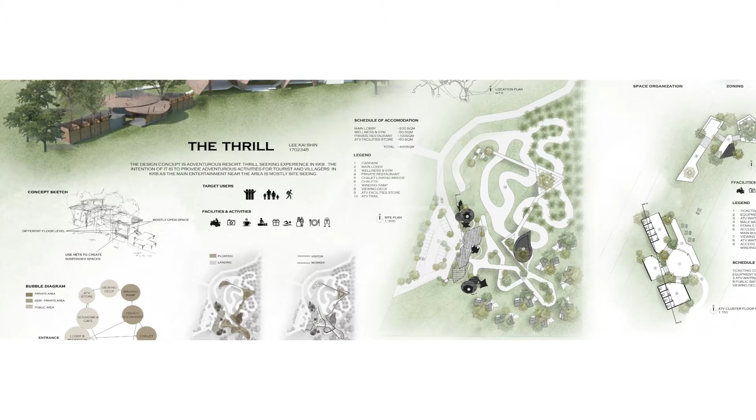This is a thrilling concept resort derived from the hierarchy of vegetation on site. This adventurous resort is to provide a thrill-seeking experience for tourists and villagers in KKB, as their entertainment in the area is mostly sightseeing. The activities provided are to attract thrill seekers, families, and tourists.

The site is split into two zones, landing and floating. All the buildings that sit on ground are categorized as landing, whereas the suspended buildings are floating. The purpose of this zoning is to strengthen the concept of thrilling experience by celebrating height in the proposed design.

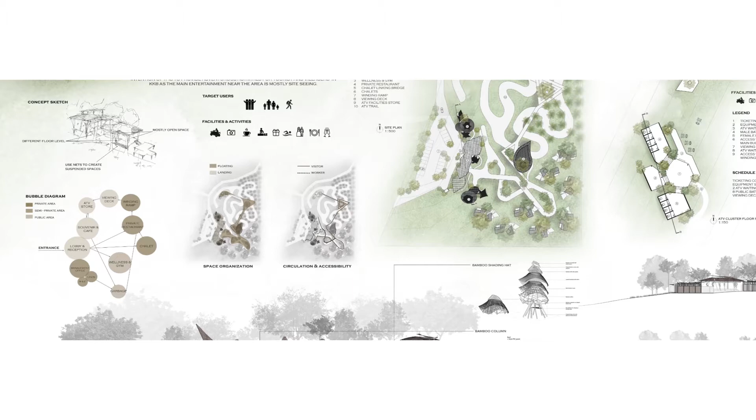This is the idea sketch of my concept, which uses mainly three methods to interpret the concept of thrilling. First, creating mostly open space by minimizing the use of walls. Second, each building is positioned at a different floor level. Third, the use of net as a shading device and building element to create suspended space.

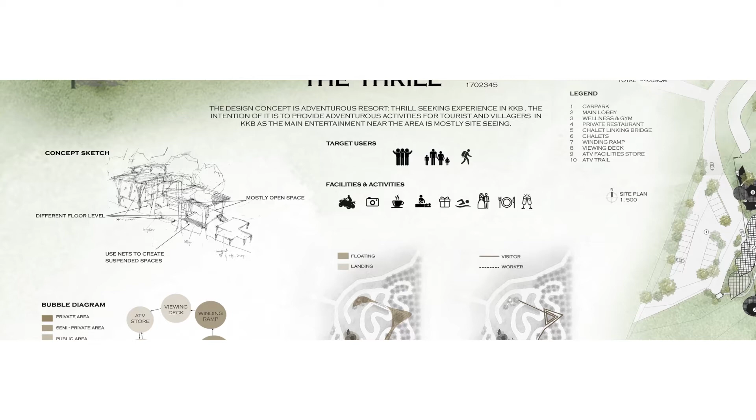This is the bubble diagram of the overall site, and this is the overall site section cutting through the ATV store, main building, and the wellness center.

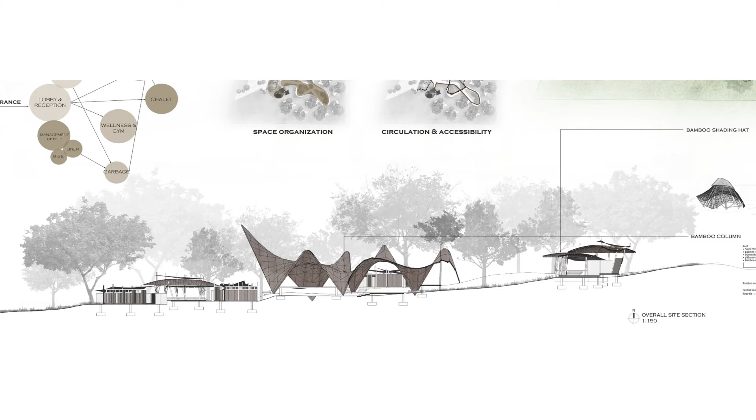This is the site plan. The buildings are linked by a bridge that brings the user from the ground to higher ground.

Now I'm going to talk about the floor plans for my three clusters. The first one is the main building cluster, which includes a lobby and a wellness center.

All of the spaces are basically categorized into two zones, workplace and shared place, where the workplace is only accessible by the worker.

This is the dropping area right in front of the reception. From the right side of the building, the management office and the garbage room are located at a distance from the lobby. This is to provide privacy for the workers.

At the left side of the building is a cafeteria with a souvenir shop. The guests can also access the ATV store through the souvenir shop.

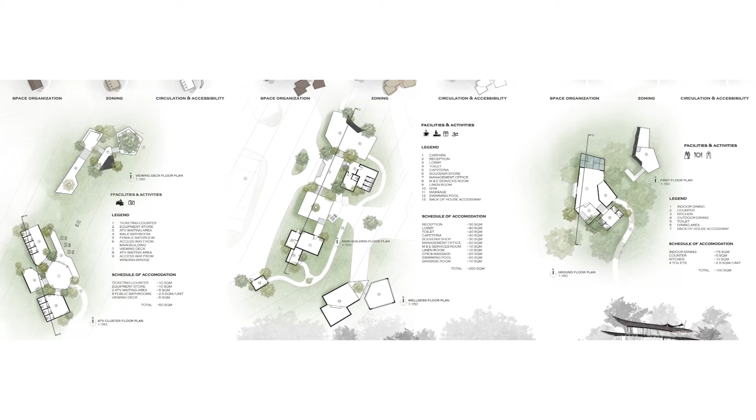This is the section cut of the main building and the elevation for the cluster.

Next is a cluster mainly for ATV facilities. In the floor plan, the ATV equipment store is located right behind the ticketing counter for the convenience of the worker. There are also public bathrooms provided for visitors that came for the quad bike challenge.

In front of the ticketing counter, there is a waiting area for users to access the viewing deck. And this is the plan for the viewing deck.

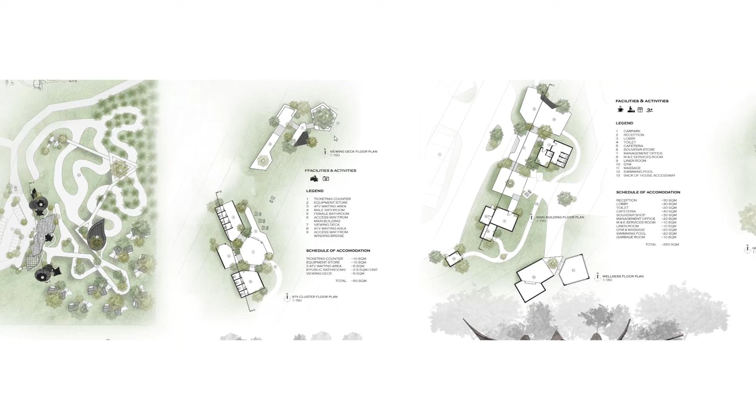This is the cut section of the rear side of the ATV store and the front elevation of the ATV store.

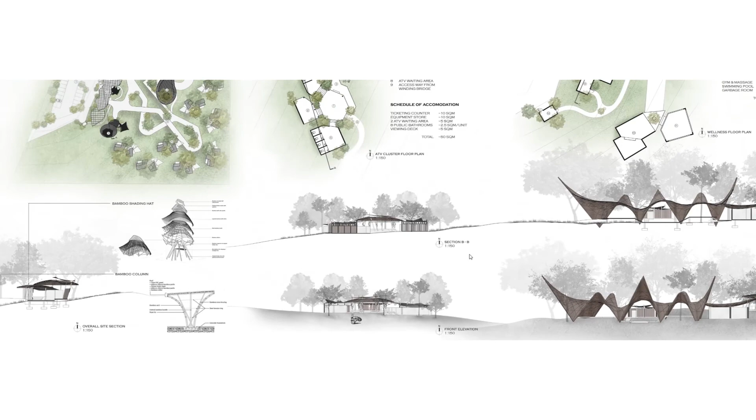The third cluster is a private restaurant with a winding ramp connected to the viewing deck. The restaurant has two levels.

On the lower level, indoor and outdoor dining areas are provided. At the kitchen, there is an access way for the back of house to prevent any interruption to the guests.

On the higher level, the empty space here will be covered by the net to provide a bigger suspended play space for the user.

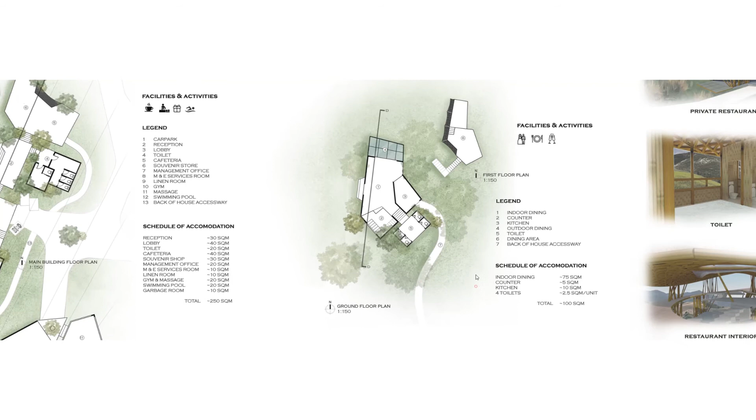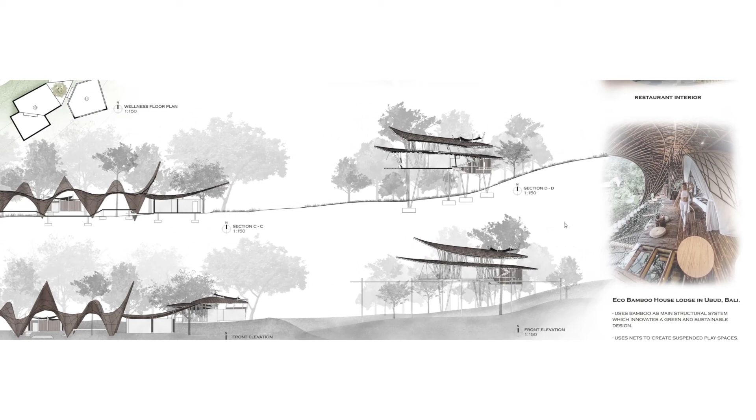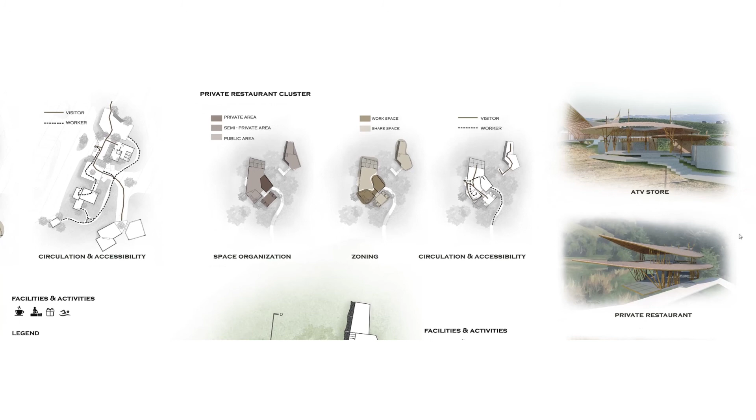These are the exterior views of the ATV store and the private restaurant, and interior views of the toilet and restaurant.

These designs are inspired by the Eco Bamboo House in Bali. They use net to create suspended spaces and bamboo as the main structural system for the whole building.